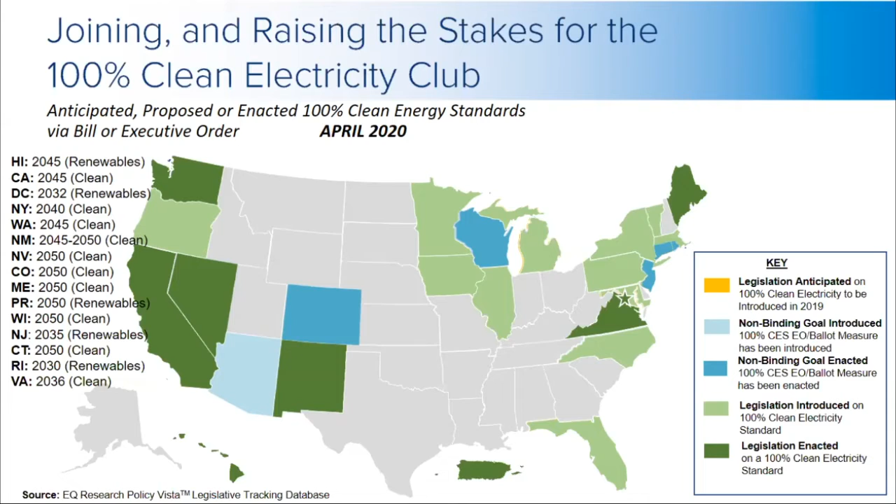Oregon introduces legislation. Arizona—we're seeing red states, blue states, purple states. North Carolina introduces legislation. Maryland and Michigan introduce legislation. And finally, there's New York bouncing in, a little out of sequence for the dramatic effect there, but New York passed 100% clean electricity legislation last year.

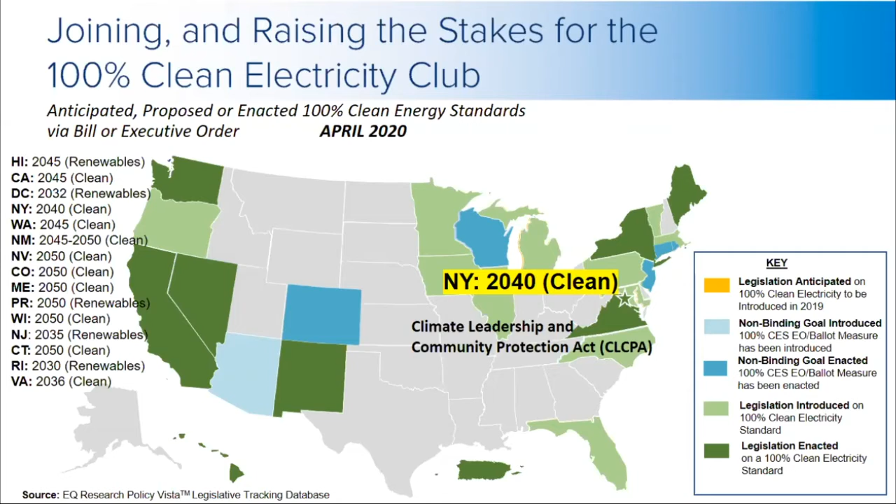So we now have 14 states. In just over a year, we got 10 more. And if we didn't have the current situation, I'm sure other states would be moving in this direction. So the states get it—the states understand that a clean grid is critical to building electrification to make progress on climate change.

So New York State's legislation is the Climate Leadership and Community Protection Act, passed by the legislature last summer and signed by the governor into law in the fall. It is very aggressive. Bottom line is a carbon neutral economy-wide goal for the middle of the century, with a specific greenhouse gas reduction target of at least 85% by 2050, below 1990 levels, shooting for higher, but potentially using offsets for the last 15%.

On the way, you've got a 40% greenhouse gas reduction target for 2030. And the important part of the carbon-free grid: 100% clean electricity by 2040, 70% renewable electricity by 2030. The difference there is real.

It allows nuclear to stay in the mix for 2040 if the plants are still operating in New York State. It also sets specific technology targets, with a big investment coming in offshore wind. We've already had our first procurement last year and are working on our second, looking for 9 gigawatts of offshore wind by 2035, 3 gigawatts of energy storage by 2030, 6,000 megawatts of rooftop PV by 2025, and a big energy efficiency codification. I'll get to that a little later.

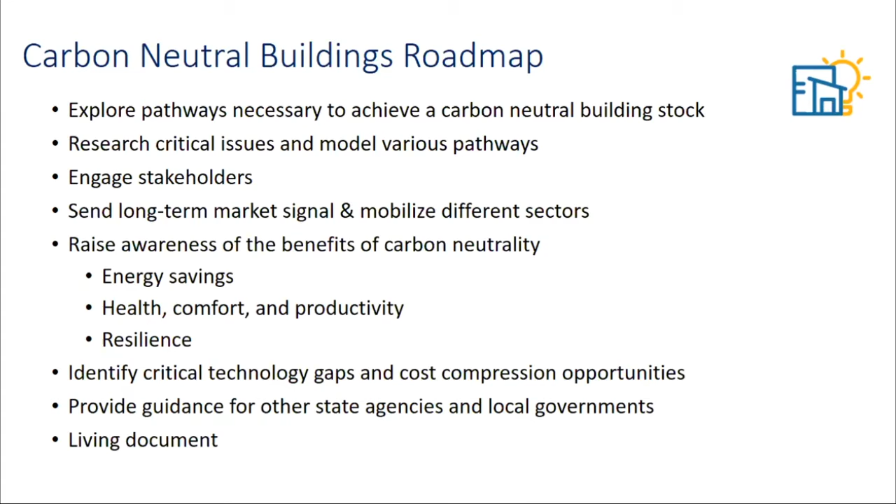And don't forget that it's not just about energy savings. There's a lot of health, comfort, productivity benefits. That's not lost on the Passive House community. Everybody listening to this probably understands how important that is. And also there are resilience benefits here.

So we've got to cover new construction. Codes are very important there, but we've got to cover existing buildings, and that's a harder task because at least three-quarters, if not 85-90% of buildings that will exist in 2050 already exist today. So we've got to figure out how to get at those buildings either comprehensively, if you're doing a large renovation, or through a phased capital plan as you're replacing assets when they reach the end of their useful life.

Lots of things we're covering in the roadmap. Just the definitions that we talked about, business case, value proposition, electrification, again a central strategy. So we'll be thinking about technology. What do we need? What's out there? What are the limits to electrification? Where do we need to be thinking about renewable fuels, biomass, and renewable natural gas?

There will be a lot on policy, resilience, and importantly, what's next? What don't we know? What do we need to know to advance as quickly as we can? We're looking to wrap up the first draft this summer, take a presentation out probably virtually to a broader stakeholder community, get comments back, integrate them all, with more research coming in, with the goal of publishing by the end of the first quarter of 2021.

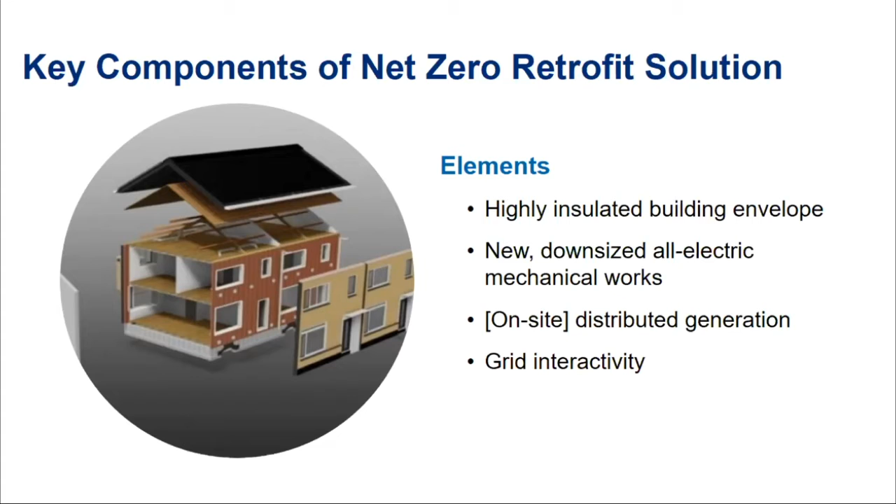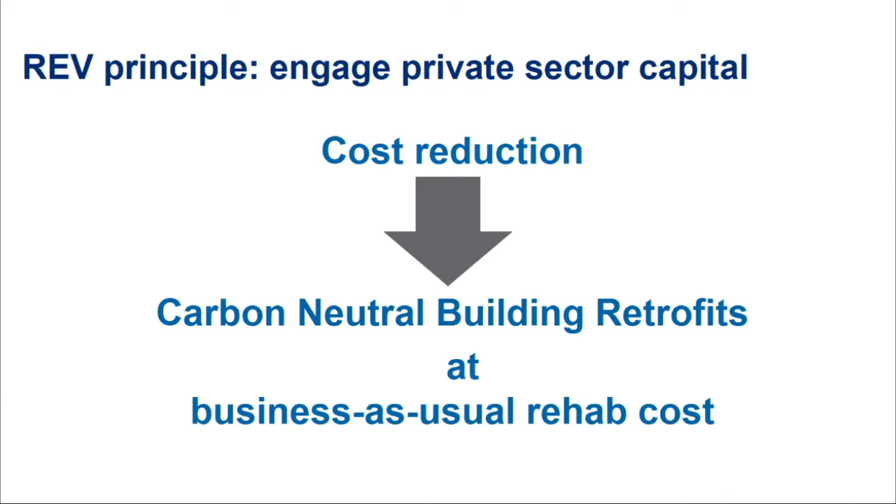And then adding grid interactivity is important here too. I talked about cost reduction, mentioned it earlier. This is a primary focus of this work - when you can get carbon neutral building retrofits at cost parity with business as usual, that's when the private sector is going to say okay, because we get that carbon neutral retrofits actually bring more value than just comparing the initial cost. So that engages private sector capital, and we get investment and scale in this industry.

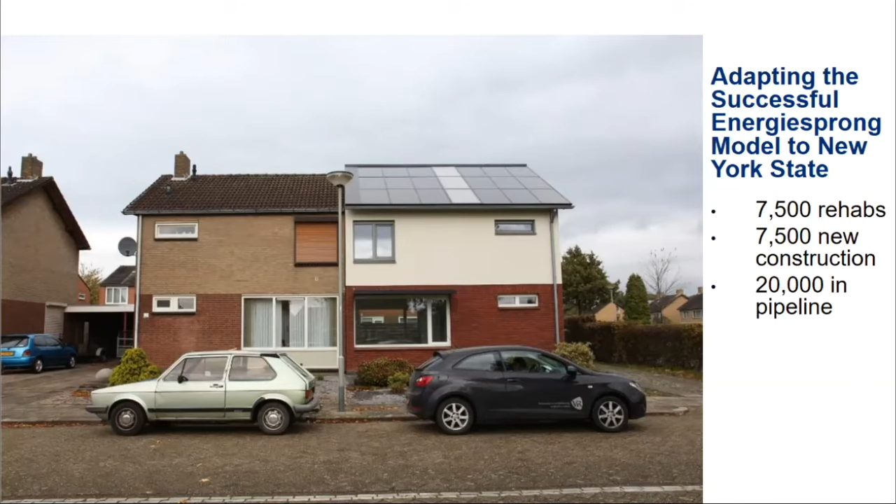So you may think, he's going backwards, but actually I meant to do this. When we hear folks from Energiesprong talk about their program, Jasper uses this slide, and he says, okay, there's the buildings, but really it's about the cars. And what he means is, think about the transition in the automobile industry over the last century - the amount of value that's in that car today versus the Model T, and it's really at cost parity given the inflation over time. So how did we get there in the automobile industry?

Well, that's an industrialized, standardized process. Everything is working together into this industrial situation. So you have these chassis come out, and the whole supply chain is working directed toward that. The whole customer experience, sales and maintenance, it's all integrated and working along this one assembly line that can put out 40, 50 different versions when you think about the different trims, the different engines, the different colors, but it's all based on this one system.

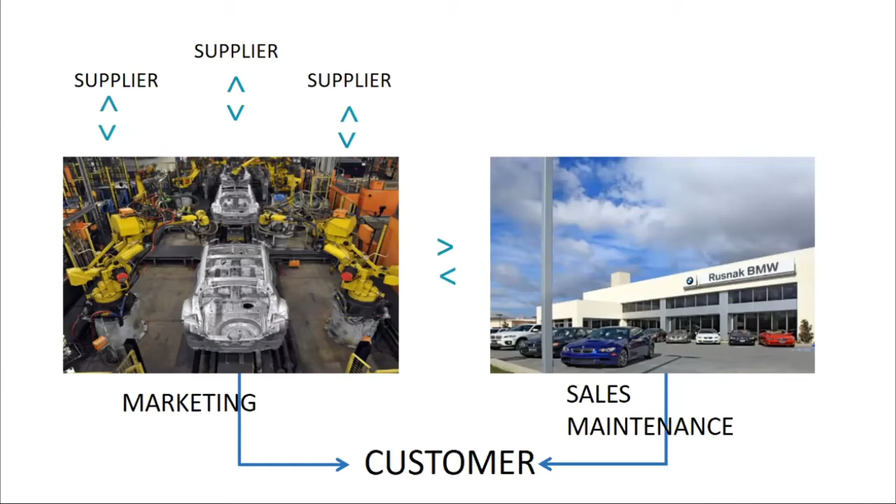We don't do that in construction, and we need to reinvent construction. That's what Energiesprong is doing. That's actually what McKinsey says is an extremely attractive opportunity. Interestingly, this study came out from McKinsey after Energiesprong was already working on their program.

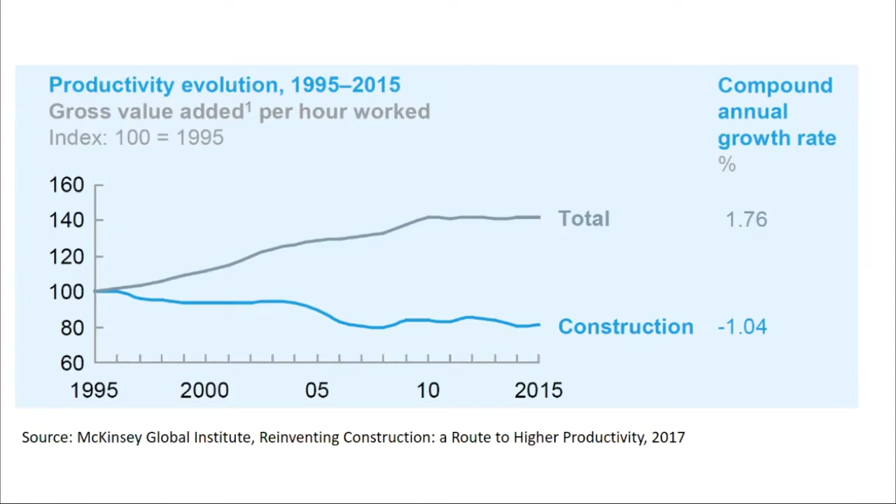Productivity in the construction industry has been flat or actually declining over the last 20 years, but it actually goes all the way back to the 60s. There are a number of reasons for that, but every project in construction is generally bespoke. It's a different thing, a snowflake. So while the rest of the world is figuring out how to get more from less, the construction industry has not been. Take a look at this slide.

There is enormous opportunity in prefabrication. Look at the bottom numbers there, 5 to 10 times productivity boost. That's not going to work for all building types. We're not saying put a new facade on every building in the country, but it's going to work for a lot of buildings, and that's why we're so focused on it.

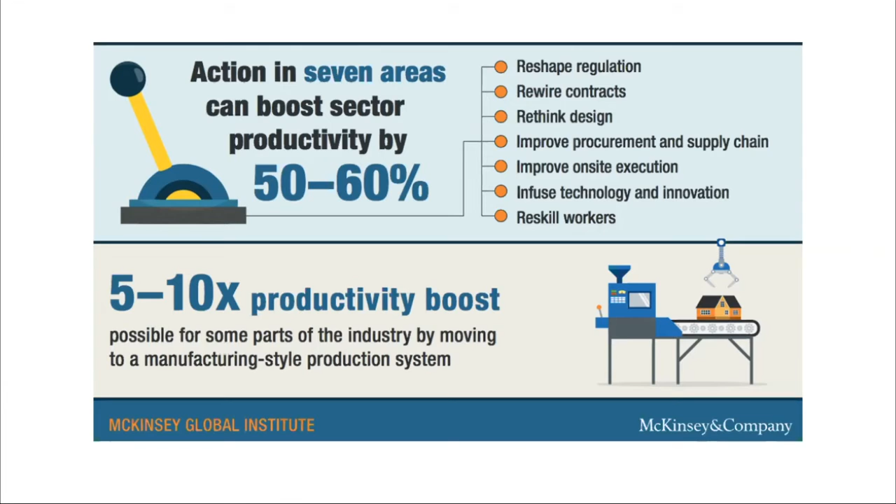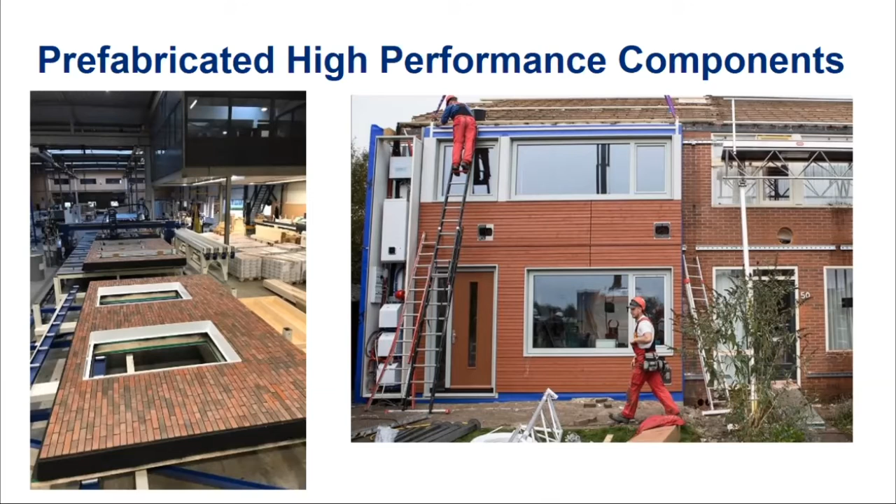So here's your conventional process. It's very labor intensive on site. These people are applying EIFS to the exterior of a building. Here's the new way: this is a controlled environment in the factory. They're making these panels extremely high performance, air sealed, well insulated, air sealed around the window connections.

And then they're trucked on the site, attached to the building. Same thing for mechanical systems. This was a first generation mechanical system for one of these Energiesprong retrofits. Looks a little Rube Goldberg-ish. It's got all the right things, but they're just sort of thrown together.

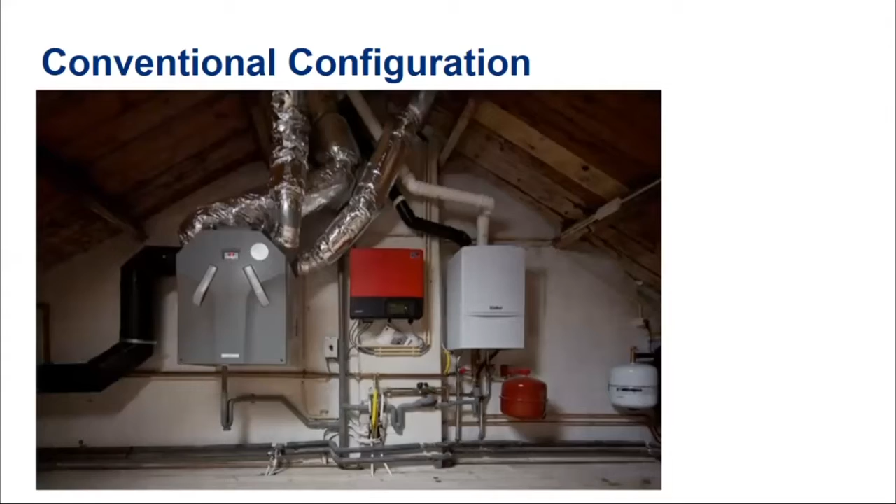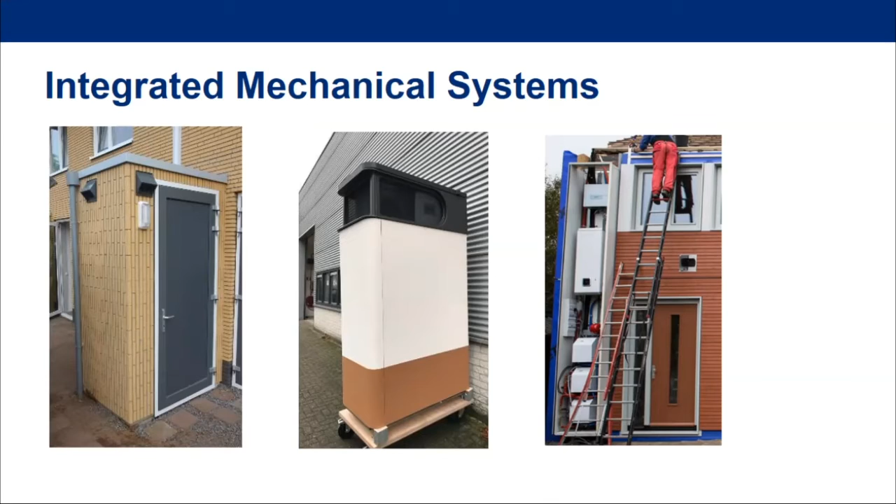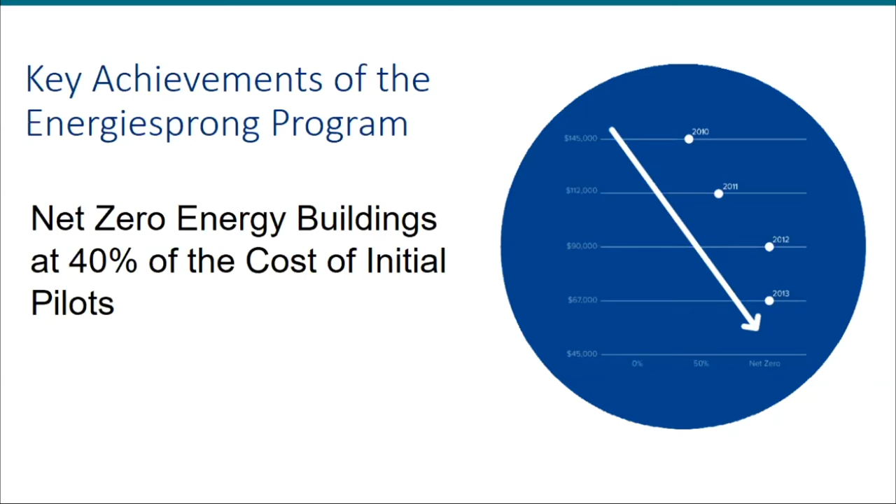And that's where you can see the cost compression, and it's been proven out by Energiesprong. They are doing buildings today, and they've completed at least 15,000 of these, so they're starting to get to meaningful scale. They're now producing them at roughly 40% of the cost of their initial pilots, a 60% decline in cost, which comes through learning, increased demand, transparency, and scale. That's really where we need to go.

So stretch code, critical. New York City has adopted NYSERDA's stretch code, and it became effective last month. That's exciting. This is dramatically increasing the energy efficiency requirements in new buildings. And as I mentioned, we're trying to take the codes to zero by the end of this decade.

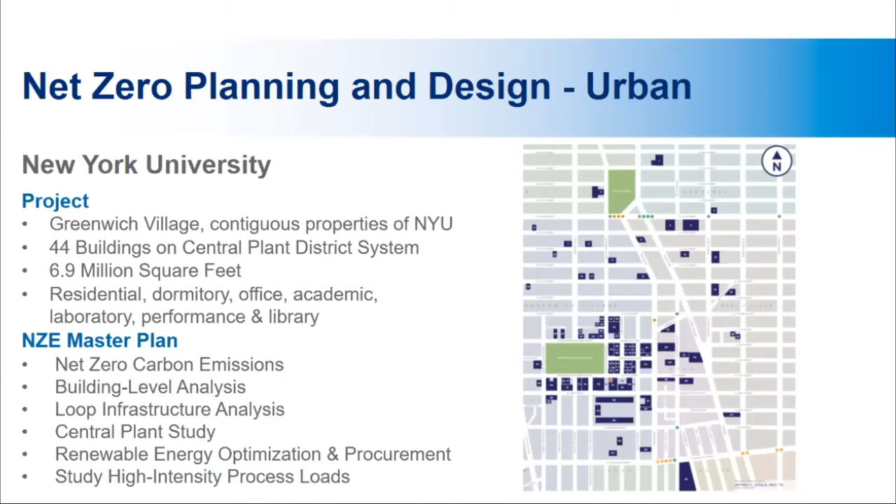We also have awards for community scale planning and design, through the Net Zero Energy for Economic Development program. It has a community scale category, and NYU won an award last year. These awards are up to $5 million for thinking through how to get an entire campus to carbon neutrality. Same thing at University at Albany, Uptown, another award winner under that program.

Category A under net zero energy for economic development is for individual buildings that are economic development opportunities. This is an award winner from Pelham. That program is still going as well.

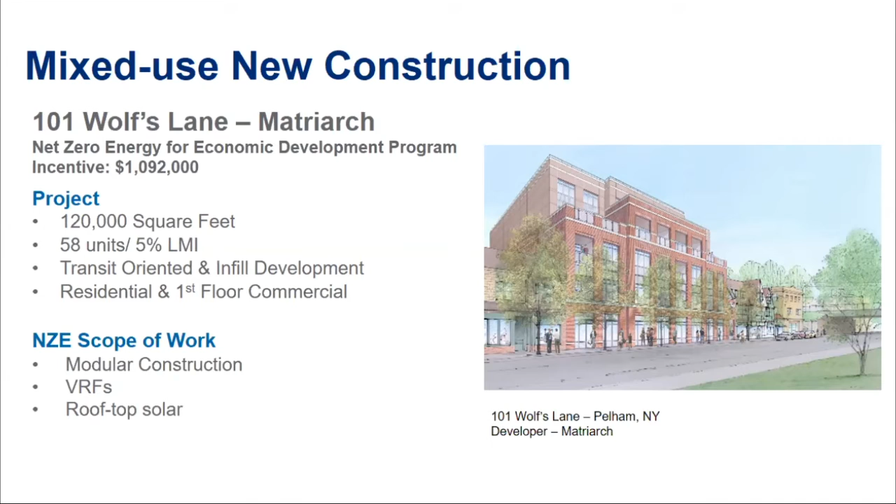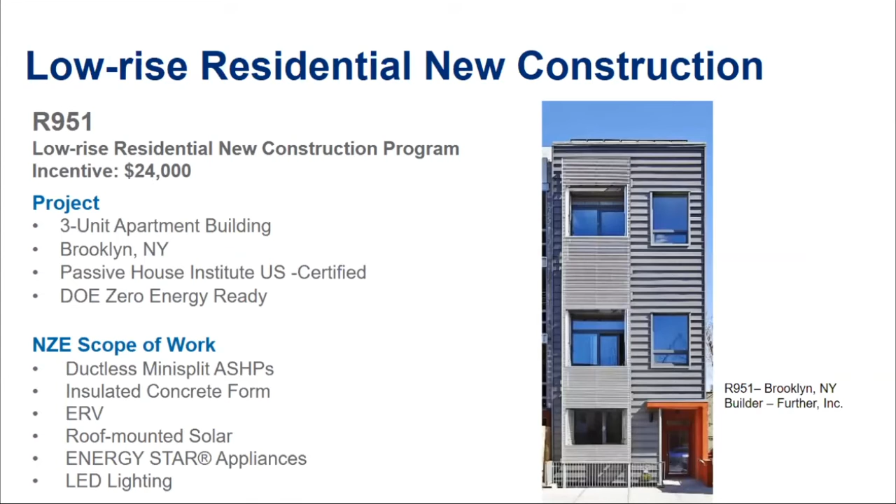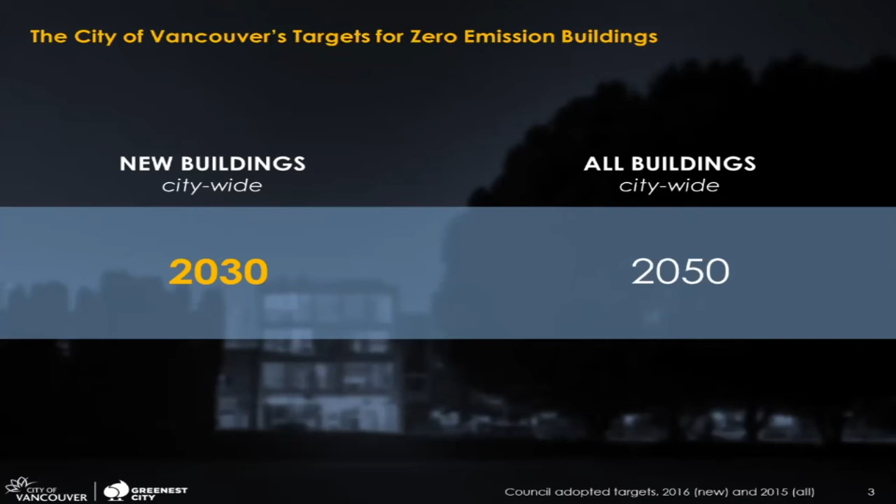Why does any of this matter in Vancouver, and how did we get here as a city? It's worth noting right away that we've had for some time some pretty significant targets for zero emissions buildings. The goal of having all new buildings built to a zero emission standard by 2030 has been in place for a few years. By zero emissions, we mean about 3 kilograms CO2 equivalent per square meter per year or less. I don't know how that translates into imperial units, but maybe it's 10 ounces a square foot or something like that.

The question is also, why do we focus on buildings so much? Vancouver, unlike other jurisdictions, has relatively little heavy manufacturing, and the consequence is that most of our carbon is emitted by our buildings. It's just heating and cooling the buildings and providing the hot water for them. 2.4 million metric tons of CO2 equivalent per year - a fairly significant load to the atmosphere.

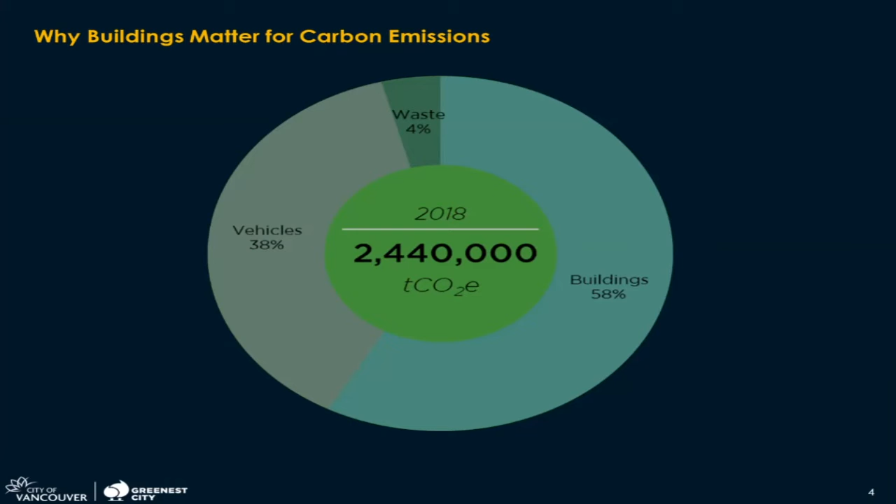The basic document that the green building team, at least for my work, is based on is a very good report from 2016 called the Zero Emissions Building Plan. One of the neat things this plan did was to set out 4 different strategies to try to get to those near zero buildings by 2030. First, I think also similar to New York, we committed to walk the walk.

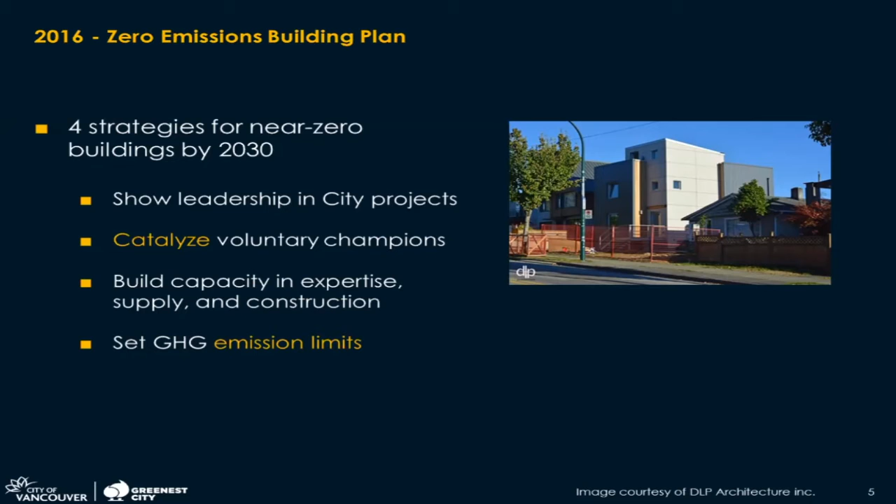If we were going to build new buildings for city facilities, we were going to go for zero emissions buildings for our own work. We were also going to try to catalyze those early adopters, those voluntary champions that were out there. Back in 2014, 2015, they were fairly few and far between.

The image on your screen here is one of the very first, if not the first, passive house in Vancouver by DLP Architecture. This was a bright architect who took on the challenge himself for his own project and did a great job with it, one of the first buildings in Vancouver.

We also tried to build capacity and expertise, so that's the consultants and the builders and everybody who has to make these buildings work on the ground. And we're also moving to set actual performance-based emissions limits.

So how does passive house fit into this? I'll say right away, it's not about the specific metrics necessarily, not about 0.6 air changes per hour or 0.05 cubic feet per minute. Our experience has been that just adopting the passive house standard and people taking that on has produced a great training tool for doing better buildings in general. It gives you clear control standards and checks through the process.

It tells you as a new builder or new designer everything you need to know about efficient building design. Our experience has been it attracts some great builders and designers, people who are bright and keen and willing to take on these things. It also holds everybody accountable. There are pretty clear performance metrics as you go along, and those things help with everybody's clarity and transparency.

We also found we could translate some of the lessons from individual buildings and people's practices into wider policy and practices.

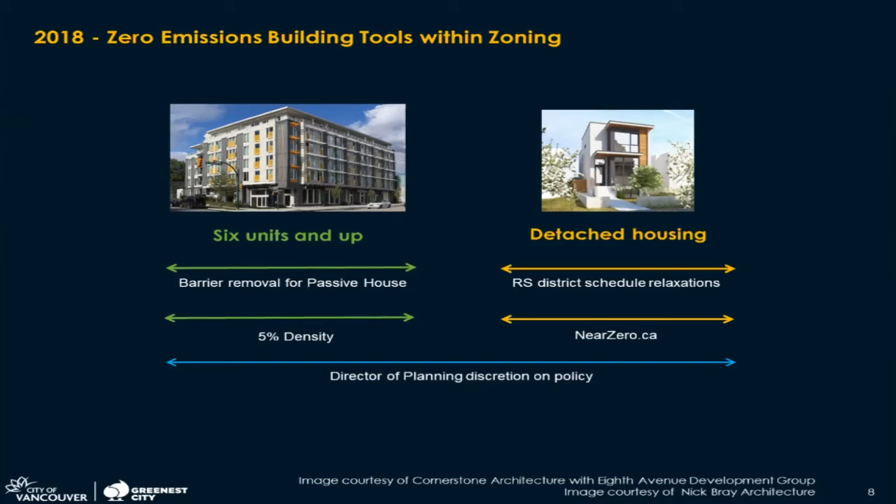We also benefited from interest and cooperation with the province. The Near Zero Incentive Program was co-sponsored by the City of Vancouver and the province of BC. It offered a fairly decent amount of actual cash. Now, that cash didn't come from the City of Vancouver, but we helped sponsor the program overall.

This is for people who are doing detached housing in the Lower Mainland. If they were hitting passive house and they had air source heating, they could access this funding up to $23,000. It's been quite helpful. That image on the right, by the way, is designed by architect Nick Bray, a single family house on a fairly tight lot. It might be nearing completion now, so we may follow up on that one and find out how they've done.

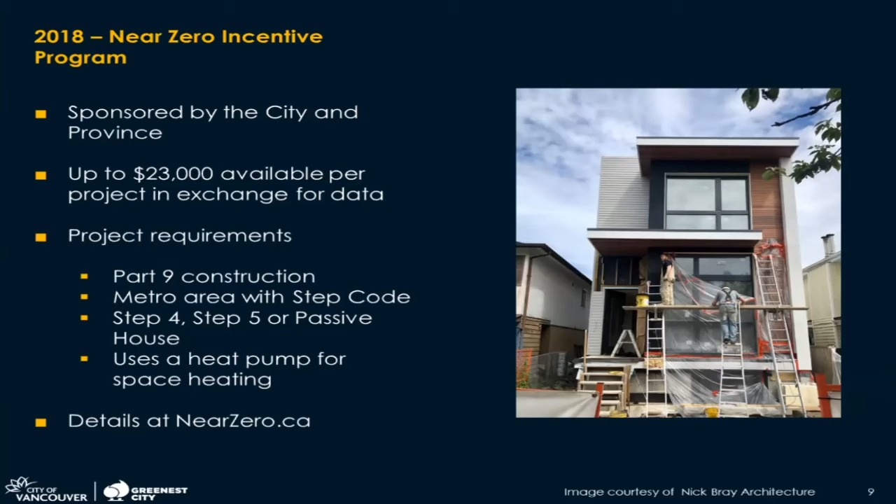Also in 2018, we saw the very first actual incentive offered by the City of Vancouver directly. Unlike the provincial sponsored program, this one was us, the City of Vancouver. With Council's approval, we brought out a program whereby we were able to offer an increase in floor space to projects pursuing passive house or equivalent standards in multifamily housing, without going through a rezoning. So it's a much faster process, and folks can see what they would be getting in return for taking on passive house. I'm happy to see we've had a number of projects come forward since then.

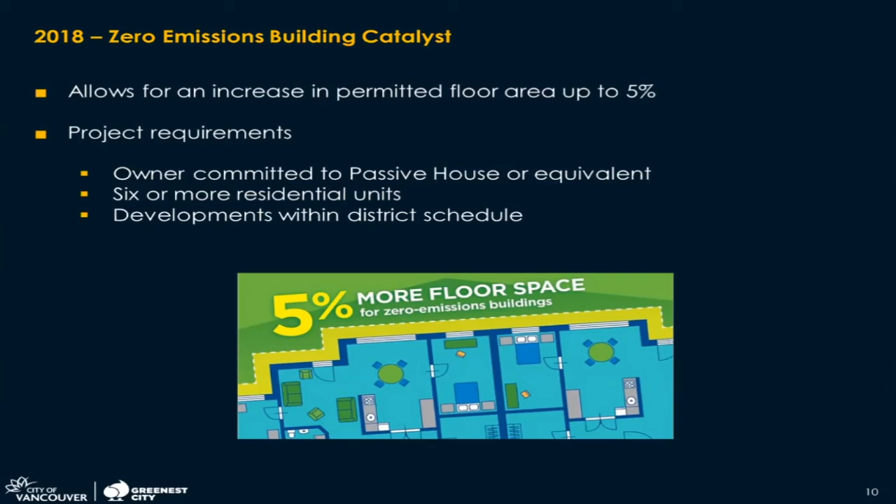The big shift, I think, politically in terms of the urgency and the desire to really take on a whole gamut of programs to advance zero emissions buildings probably came in 2019, when our council declared a climate emergency, much as many cities around the world did at a similar time in response to the IPCC report that Greg mentioned.

We brought forward a whole range of programs, and I'm just going to talk about two of them today: the heating and hot water systems going to zero emissions within about 5 years, which is quite a pace, and some improved floor space incentives for zero emissions detached housing.

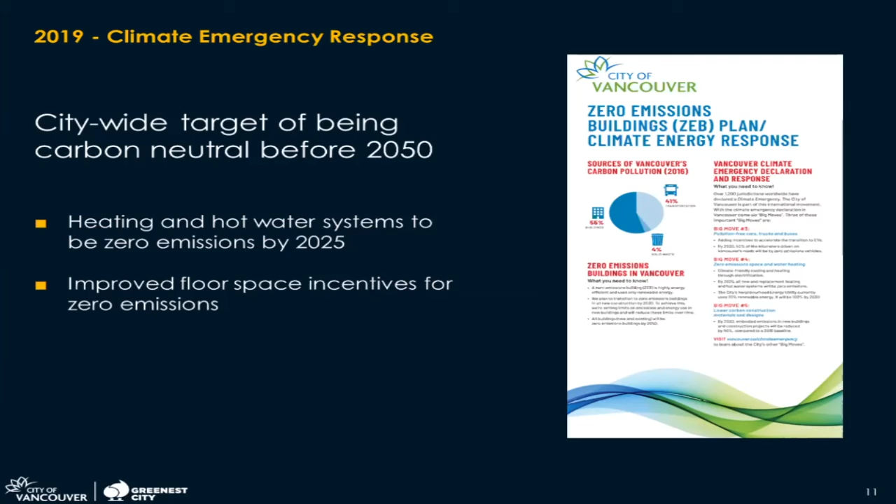First, the code change, and I continue to be impressed by this. This was brought out by a whole team on the code and the green building team side, but it basically set out a requirement in the building code, not as an incentive program, not as a voluntary measure, but in the code for zero emission space and hot water heating. It also set out improved building envelope metrics for roofs, windows, and air leakage. It also brought people an option to go to step 4 metrics, and it tightened the performance of various building components.

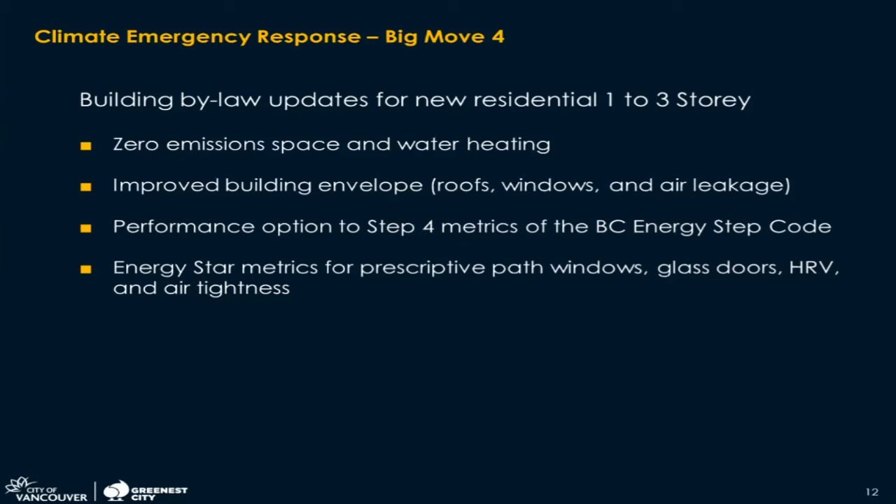The other one, now this one is a voluntary measure or an incentive measure, was in response to some challenges identified to us by different green building practitioners at the 1 and 2 family scale. One of them was that although our zoning bylaw had a whole raft of exclusions and variances designed to accommodate green buildings, including passive house, they were pretty complicated. So I alluded to that thicket of regulations that the applicant or designer sees. From a customer's perspective, although there are tools out there to help them do green buildings, they can be complicated and require multiple calculations on different levels.

Just as a gory example, I invite you to try to read our former bylaw 10.33.2, that says the Director of Planning can exclude an area equal to the area occupied by the insulation thickness that exceeds the applicable thermal performance value for the exterior walls in the building bylaw. That's a mouthful in and of itself, but just pause for a minute. It's not telling you you can exclude the area based on the insulation, it's now based on the whole performance of the wall. So you end up having to prorate a portion of the insulation relative to how much the wall's overall performance exceeds the minimum requirements in the code, and you'll have to do that for each different assembly in the building.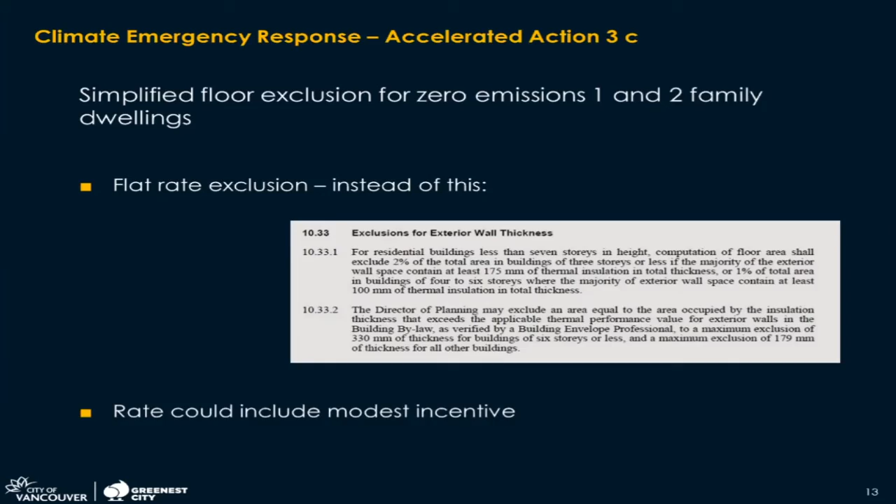As we took on this challenge from the council motion, we discovered pretty quickly there were a few challenges and a few potential solutions. Some of the interests we had to address were equity. Now, Greg noted equity is a component of New York's programs, maybe no less so here in the City of Vancouver, so we had to give thought to how that might be reflected in these. We also knew there was a parallel interest in preserving character and heritage houses, so as we brought forward this program, we had to think about how these things might work alongside, or at best not have one overwhelm the other. So we're looking for some sort of parity there.

And finally, there's the unsexy problem of administration. How do you actually administer a new rule or regulation that you bring out? Who checks it? Who verifies it? What does it mean as a customer to try to use this product? We got lucky early on.

We started doing our research, and one of the first things we noticed looking at 1 and 2 family houses was that as you got into a duplex unit, you typically needed a second HRV unit. You needed it because most people aren't going to move into a duplex and share a common air handling system. They want their own system, which is reasonable. Fire separations also weigh on that decision to go to 2 separate HRVs.

There was an existing HRV exclusion, which we intended to roll into this all-in-one, simplified approach. It was pretty quickly obvious that we should be offering a higher exclusion rate for the duplex project because of the space taken up by that mechanical, compared to single family. That also means that as people are doing 2-family housing, which is a somewhat more affordable form than single family on a detached lot, they were also able to access a higher incentive, which did help with equity to a small degree.

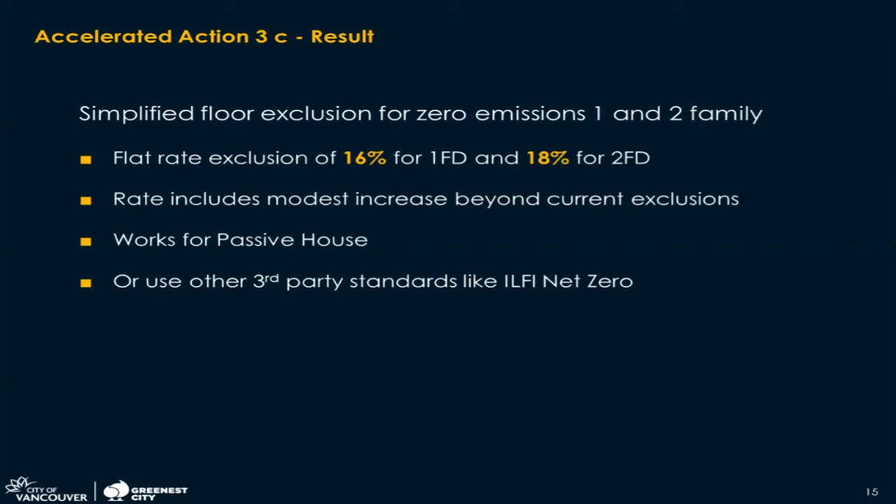We also broadened the approach a little bit to include other comparable third-party standards, just to make sure that if there was some peculiarity of the site or the design that made passive house a challenge, folks could still access a comparable program. I'm very happy to say that was approved by council in February of this year, and we're quite happy to see it. We've got a large number of practitioners interested to learn more, and we'll be holding workshops about that soon.

We hope what it means for the designer is that their lives are a little bit simplified, at least in terms of dealing with the zoning bylaw. They need to do just one calculation instead of multiple calculations. It also means that when staff are dealing with these applications, on the administration side, there's only one calculation that they need to check in this regard. So we're hoping this makes everybody's lives a little simpler.

It is a time-limited increase in area because we know that the codes are constantly catching up, and I did mention the zero emissions piece that we also just passed. So we're working both sides of the equation, trying to bring the codes along at the same time that we're improving our voluntary measures.

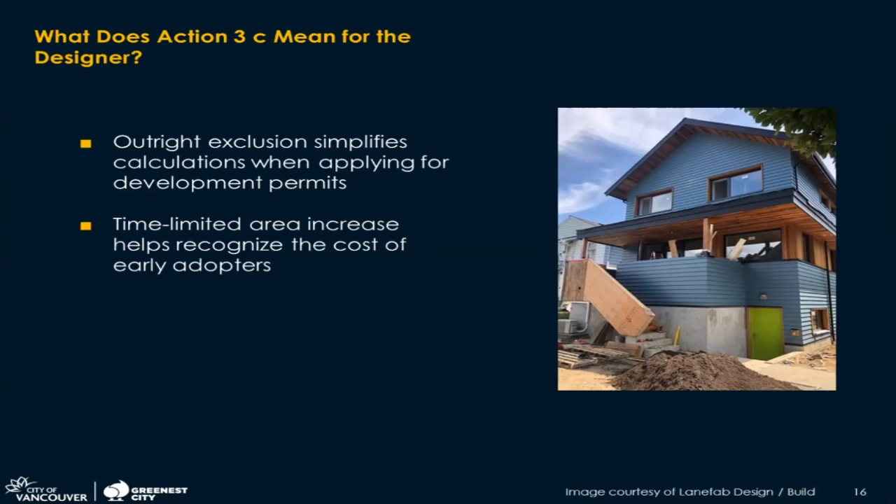Just a quick note, this is a project by one of our local practitioners, Lanefab, and a very sharp designer named Bryn Davidson, who has done multiple projects at the Passive House Standard in Vancouver. This particular one, the Windsor Street Passive House, is about 2,700 square feet.

I will say in passing, without naming names, one of the things we got lucky with in Vancouver is we have a contingent of fairly sharp designers who tell us where they're encountering problems, what the challenges are, and what some of the solutions might be. We have the benefit of being able to steal their ideas and sometimes incorporate them into policy. So just a shout out to all the guys doing the hard work for us. You know who you are.

In terms of outcomes, how have we done? These are a small percentage of the overall volume of general construction out there, but we're still happy to say we've got around 4 million square feet of projects at different stages of inquiry and application going for a zero emission standard. That's largely passive house, but also includes some projects under the International Living Future standards and net zero standards, and they're all moving in the right direction.

We actually have approvals for in excess of 1 million square feet, and in terms of projects being built and on the ground, we're north of 300,000 square feet. So lots of examples for us to learn from, lots of learning happening in the industry, and lots of knowledge sharing going on as a result of this volume.

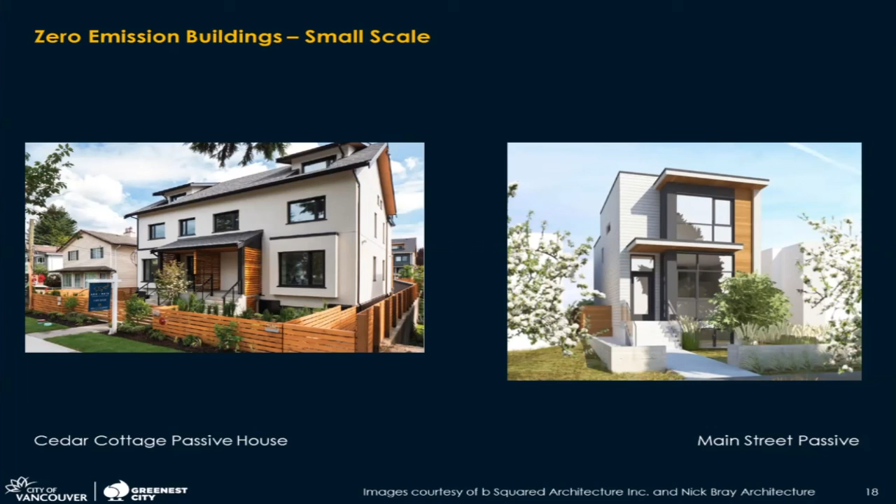On the right-hand side, you're seeing the Main Street Passive House by Nick Bray. Worth mentioning, in addition to going for a passive house, this is also a very small lot, 25 feet wide, and I think they also had subsurface soil water issues they had to deal with. But on top of all that, they're still plowing ahead with passive house, which is fantastic. I think they're even planning on trying to break some records on their air sealing, going for very, very low air changes per hour in their air seal tests. So we wish them luck and hope that's resolved by the time you're hearing this.

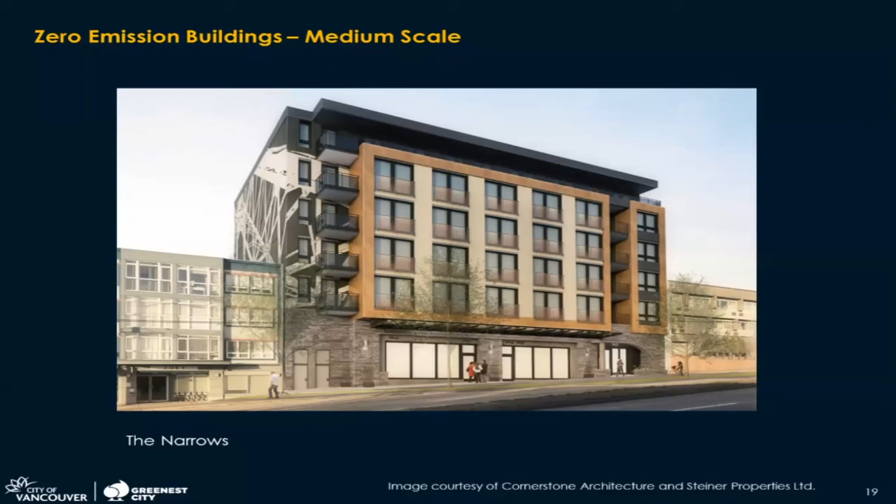Up at the medium scale, I mentioned before we have local architects who've done a good volume of multifamily housing — Cornerstone Architecture and Scott Kennedy. This is a relatively recent project, the Narrows, I think on East Hastings Street. This is 45 secured market rentals over top of retail at the base, as a passive house design.

A number of the features they're trying out there include automated exterior shading, which is a neat one — I don't think we've seen that on a recent building, although it's been used previously on some Olympic Village projects. There's also individual interior mechanical measures like double insulated lines for the hot water system. This project was also one of the winners in a recent Net Zero Energy Ready Challenge put on by the province of BC, another one of their Clean BC programs aimed at making buildings in BC less polluting, more comfortable, and more energy efficient.

So we're seeing the combination of city initiatives and provincial initiatives all coming together here in multifamily housing. That's rental — it's not just condos. This is everyday rental housing that's being built.